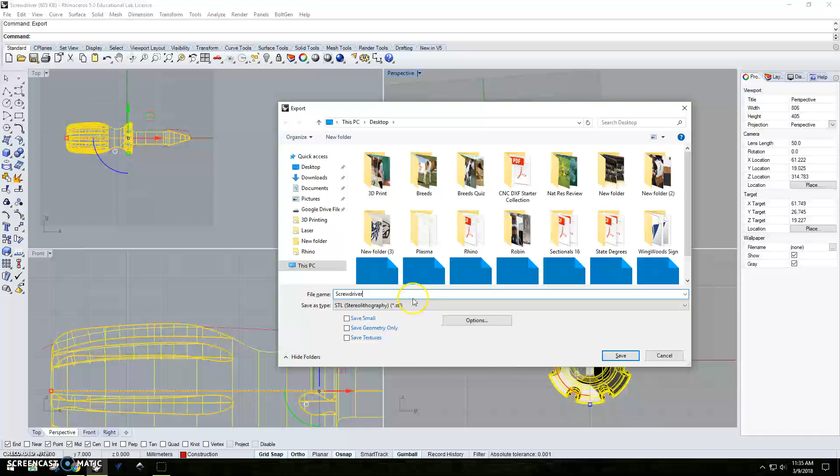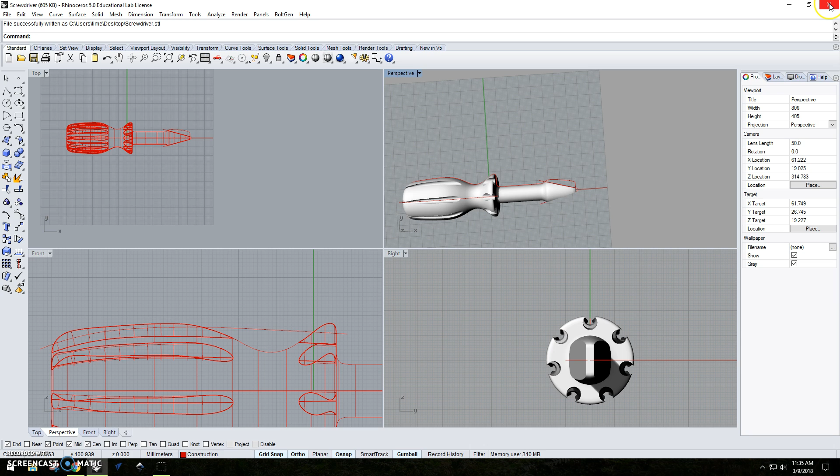I'm going to simply click on it, type export, and give it a name. In this case the name doesn't matter so much since you're going to be using it to print. Then in Save as Type, we want to find STL, stereolithography, and click on that. I'm just going to save it to the desktop and hit save. It's going to ask me this—go ahead and say OK and OK again. Now our screwdriver is in a file type that the 3D printer can read.

So I can exit out of Rhino and open up Studio. Just like I did before, we're going to click on Up, and we're going to add our file. Go ahead and find it. In my case, I saved it to the desktop, and I'm looking for screwdriver.

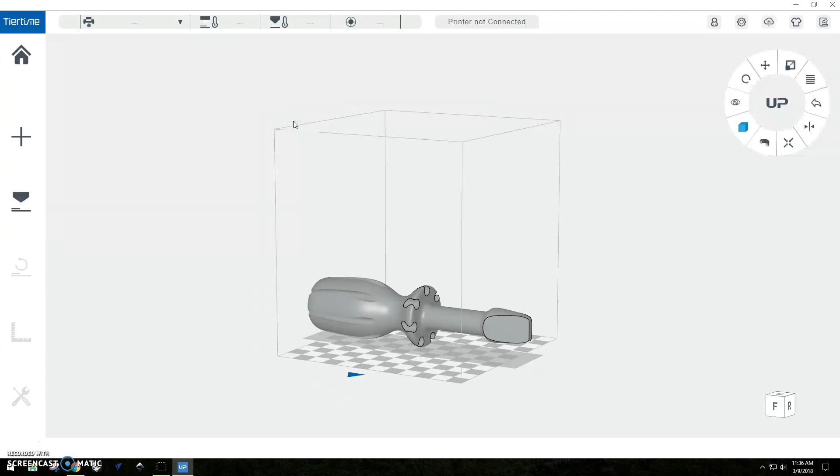Now, when I bring that in, there's a couple things that I notice. One, it's on its side, and two, if I rotate this around, it's too long to print in the up. So there's a couple of things that we need to change. We could print it like this, but there's going to be a lot of support underneath that we don't necessarily want. The easiest way to print this file is going to be to print it vertical, where this part right here is on the bottom.

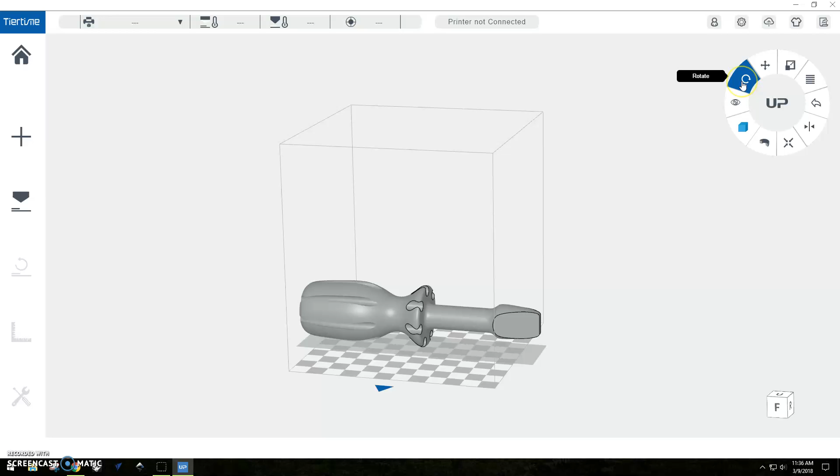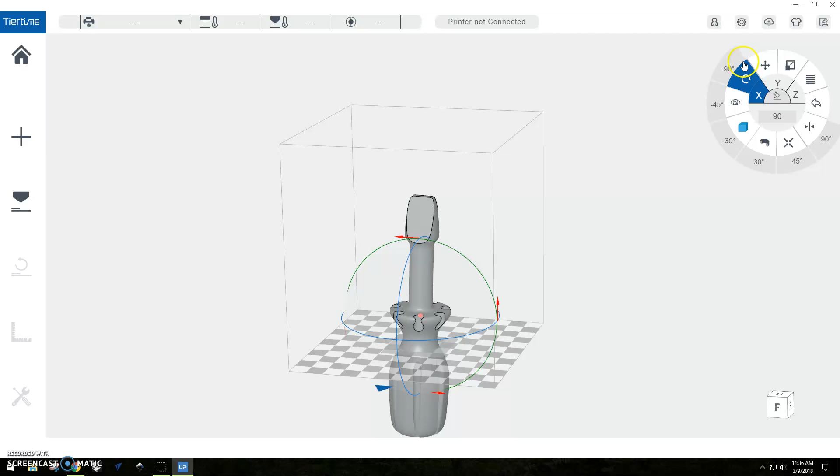So to do that, we go up here to the Up menu, and we click on the Rotate button, and it brings up the sub menu as well as some different arrows and circles that we can use. We want to rotate this 90 degrees on the x-axis, so we have X selected here. We can simply click on the 90 degrees, and it turns it upright. Now, we could have done that by dragging these, or used some other buttons in another way, but that is the easiest. So right there, it's at 90 degrees.

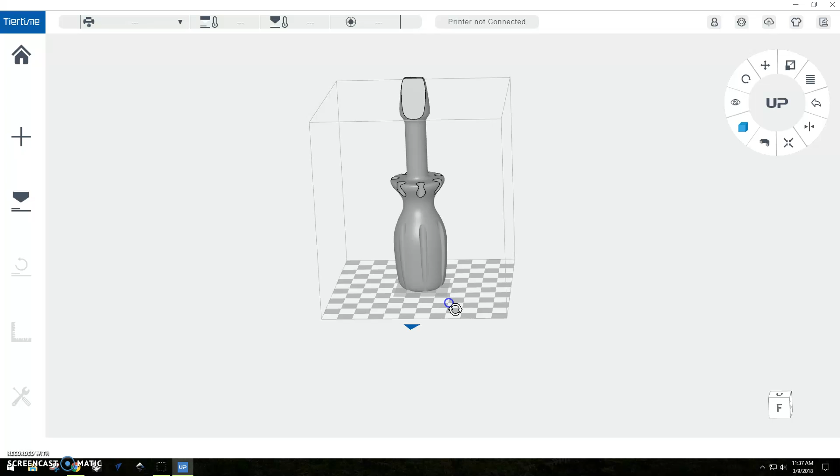This is on the bottom. But if you notice, it's down below the build plate. This button right here, when we hover over it, says Auto Place. What that's going to do is place it so that it's actually on the build plate, and most of the time it's going to place it in the center of the build plate. But now if we look, we notice that it sticks up a little too far.

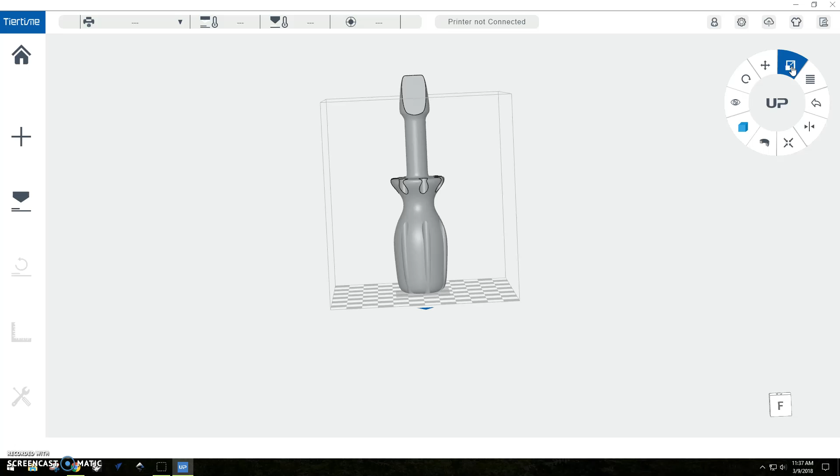So we need to scale it. We're going to go over here—we have this button that's got two boxes with a little arrow in it. When you hover over it, it says Scale. If we click on that, it brings up a submenu. For this, we want to have X, Y, and Z all selected. What that will do is make sure that it scales it on every axis instead of just one.

And we need to figure out what's going to be about right. I'm going to start with 0.8, so I can click on these out here, or I can punch in a scale factor right here. If it's greater than 1, it's going to make it bigger; if it's less than 1, it's going to make it smaller. So I'm going to try 0.8. Okay, that looks like it's within the build plate there.

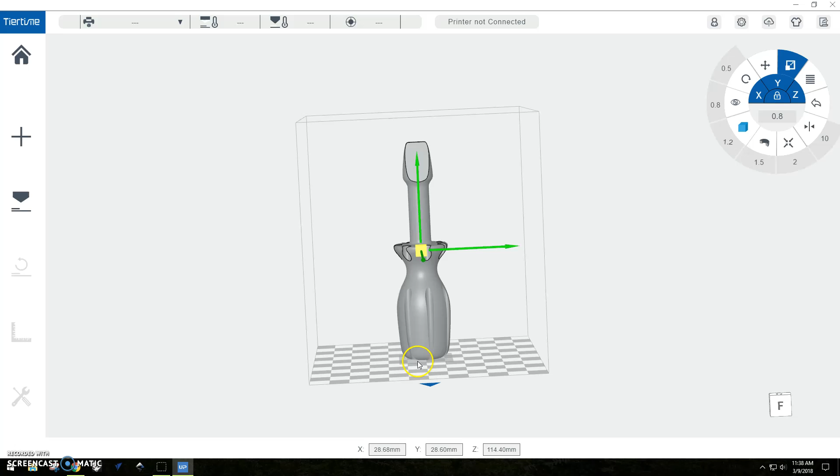So I'm going to go over to the Print button so I can do a preview. But if we notice, this just turned red. Red is giving us a warning saying something's not right or it's outside of the build area. So we're going to exit out of that, go over here and hit the Undo button, which takes it back to its original size.

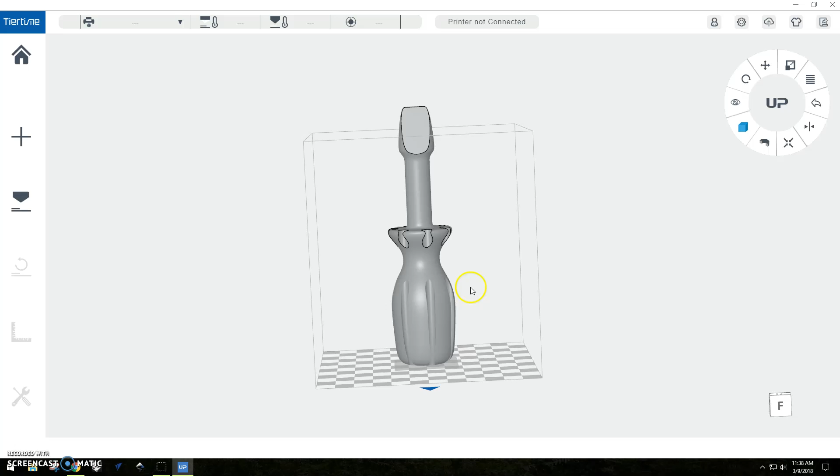And we're going to have to scale it a little smaller than 0.8. The next one's 0.5, but that's pretty small, so I'm going to try 0.75. If I click there and highlight that and type 0.75 and hit Enter, it shrinks it down and keeps it placed on the bottom. Now we'll go back to the print and see if that turns red. And it doesn't—it stays the original color, so we're good to go.

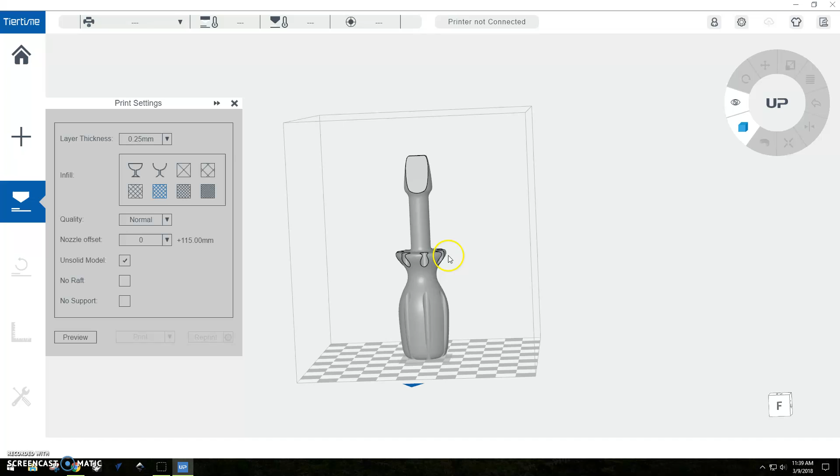We're going to do it again at 65% infill, layer thickness of 0.25, unsolid. Go ahead and uncheck the support button. It may need on your model a little bit of support out here, and that's fine. Then you can hit preview to see how long it's going to take and how much material it's going to use. So it's slicing up there.

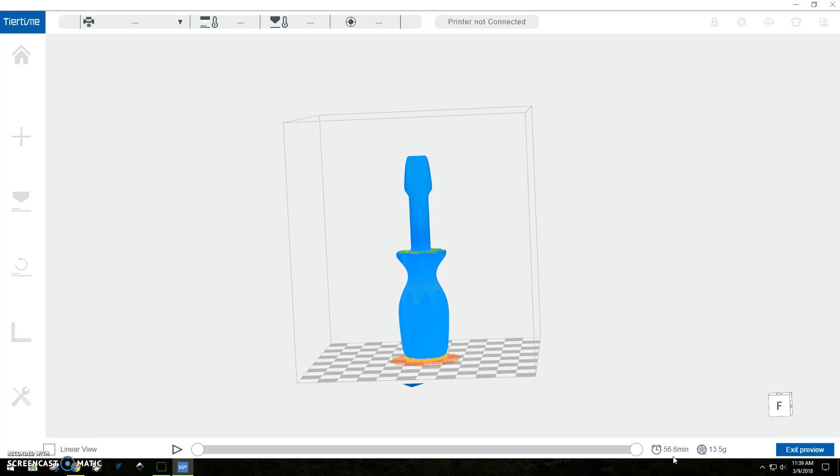It turns colors to show us what the different parts are. It says this will take 56 minutes, so that will print within one class period, which is perfect. So at this point, we can exit preview. We can unplug, or we can take our computer over to the 3D printer, get it initialized, calibrated, and print our screwdriver.